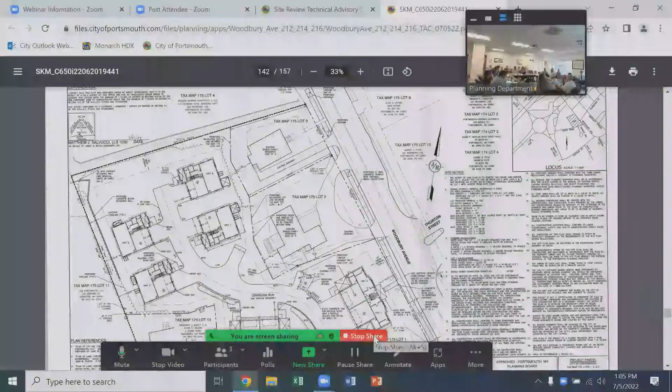The design incorporates having a driveway off of Boyd Road, to not have any new curb cuts or even use the existing curb cut on Woodbury. So we'd only have one driveway off of Boyd Road, which would line up with Manor Drive. It's a short driveway to provide access to these 8 units.

The unit makeup here is two duplexes and 4 single families. The parcel generally slopes towards the rear, or the northwest corner, which is the low point on the land. That's where we have our bioretention drainage system, and we would also be using the existing sewer on Boyd to connect these units into sewer, and we would be tapping the water main on Woodbury Ave.

We've already gone to a preliminary meeting with the planning board, and the discussion at that meeting included extending the sidewalk on Woodbury Ave, so we've incorporated that into this design. There's already a sidewalk on the other side of Woodbury Ave, but there's none on our side. So the sidewalk you're looking at on the site plan that Peter has up right now is all proposed sidewalk.

As was mentioned, there's no change to the curb cuts to lots 2 and 3. Those houses would remain, driveways would remain, and then we would be tapping into the water main on Woodbury Ave, which is on our side. We did provide lighting and landscaping plans, architectural plans by Art Forms. Wendy Welton did those designs.

Number 8 talks about confirming the right to flow stormwater onto adjacent land. Obviously, all properties flow basically onto adjacent parcels. The regulations require that we're allowed to continue that flow—we're just not allowed to increase it. So our drainage study shows no increase in stormwater rate or volume onto the abutting property. So we do not need an easement from the neighbor as long as we do not increase that, and that's the goal of your stormwater regulations.

Number 9: DPW has significant safety concerns with the stormwater detention area. The elevation of the stormwater detention area is significantly higher than the area behind the retaining wall on the adjacent property. That area is modified in order to create separation of the water table and stormwater treatment within that rain garden.

So we can look at maybe addressing those concerns by moving it away. We did try to keep approximately a 10-foot buffer along that property line, because there are some significant existing trees we want to maintain. So we tried to keep all of our grading away from the property line, except maybe exactly where the outfall is, so we could keep those trees, because they are significant and create a good buffer to the hotels behind us.

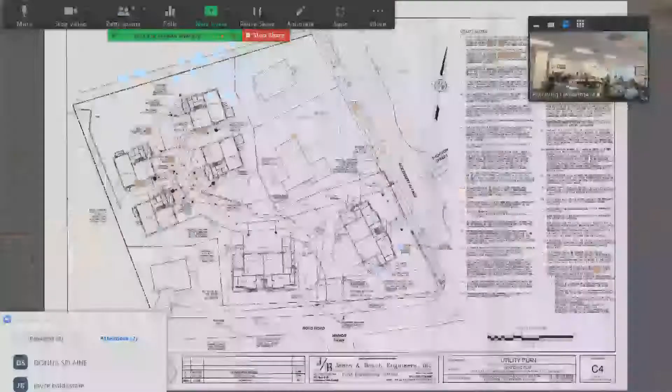Along Boyd? Yeah. Yeah, I mean, there's definitely room. Okay.

And the other comment I had was on the sightline plan that was provided. It combines two different types of sightlines. It really should be either one or the other - should have a stopping sight distance diagram and an intersection sight distance diagram. It should have a 2-foot object height in the middle of the road, at Boyd Road at the driveway, for vehicles coming up the hill on Boyd Road.

All right. All right. The 3.5 driver's eye height is correct, it's just that you should have a 2-foot object at the driveway. All right, I see what you mean, coming up the road towards our intersection.

Yeah, but as far as the sidewalk goes, we're proposing to build sidewalk along that entirety of Woodbury, which we're happy to provide, but I guess we've got to sort of figure out how much sidewalk we're building for this project. I mean, these 2 existing houses aren't really even part of our site plan application. We're proposing to tie in the existing sidewalk along Woodbury. So I guess the question is...

What do you want us to build? Because I don't think it would be fair or reasonable for us to build all of it. Certainly, the sidewalk along Woodbury is desirable, because you get more foot traffic out there. That's what we assumed as well. But it really doesn't tie into the whole site - that driveway, that walkway off of Woodbury, just comes into that one duplex.

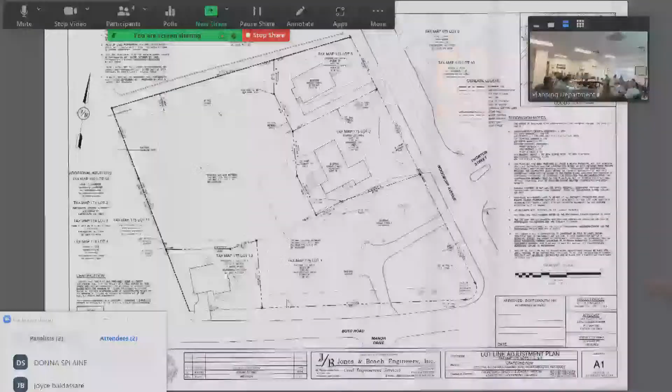Because we have some large trees on our property, we could run it through the green space on our land, or put it in the city right of way. I was going to put it in the right of way. I'd rather not lose more trees, or as many as we're already losing.

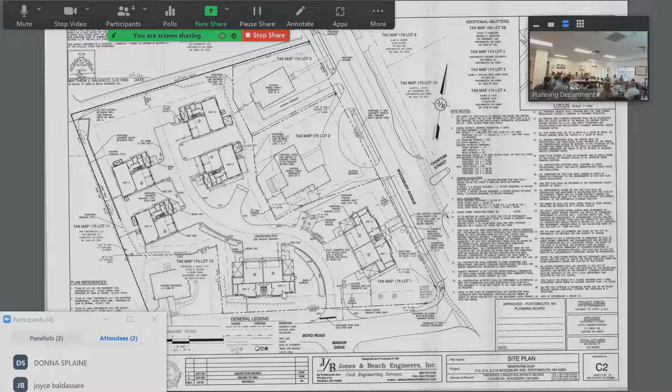It's nice that you're trying to keep the ones along the property line. I was going to ask for more street trees too on the Boyd side, maybe the Woodbury side too. There are a lot of trees out there now, nice to have those replaced. All right, we can look at that. There are a couple utility poles that are problematic right at that intersection of Boyd and Woodbury.

Maybe we can snake it between them, or put an easement on the corner. You'll figure it out, go to the back side of them on our land.

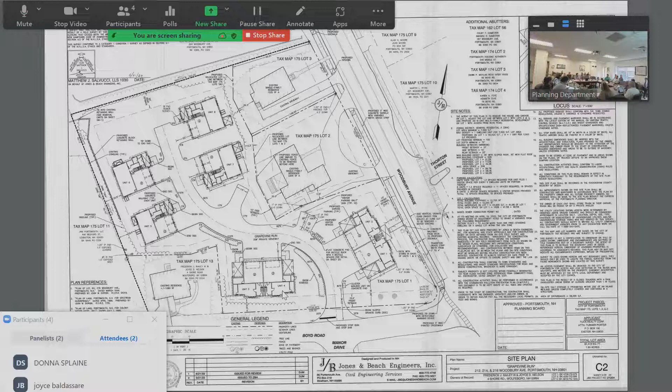Any other comments at this time from TAC? Peter, if I may. We may need a fire hydrant somewhere in there. Also, if this is going to be a Woodbury Ave address, we're going to need some signage. Just make a note that you'll need appropriate signage to get us to the correct driveway.

That's a good comment. I would think we'd have our own road name, a private drive name, and be off of Boyd rather than use Woodbury addresses, which would be confusing. I just wouldn't know how to get to them. Some kind of signage will be required regardless, if it's a private road, so it's easily discoverable for emergency access.

Is that a private road? No, this is all the city. We'll come up with a street name and show a street sign. That's what I was bringing up. So it's a Boyd Road address? It should be.

Or were they thinking of making it... where's the hydrant? I'd see it as a Boyd address, but I don't know about the unit numbers — 320 Boyd Road, Unit 101, 102. All I care about is having a sign that says 320 Boyd, or 7 Boyd, that's it.

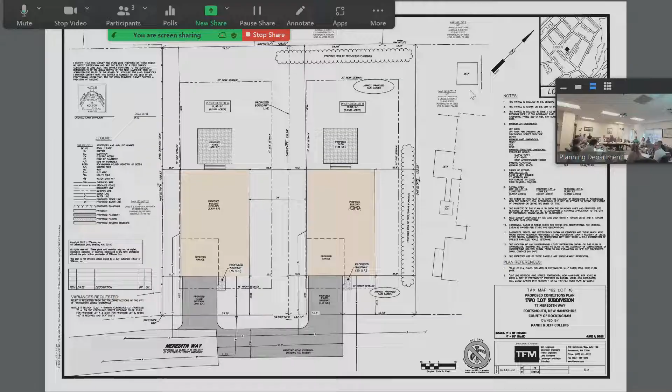This would all be open, no one would park in it, because they drive in like that and then go into that garage. I'm not trying to be difficult here, I think there's a solution that's gonna work for you and also provide a turnaround. You may just have to roll up your sleeves a little heavier on the drainage improvements on the front.

Because you're gonna have more pavement. Wouldn't you use pervious pavement? You could do it, not my expertise, but I would think you could. It's gotta be maintained, or the turnaround doesn't work for big city trucks, you might not want that.

Are you proposing rain gardens up here? I may have missed it, but it seemed like there's a lot of water at the front of the site and the back. This is standing water, but there's a lot of water in the spring up here. Is there a landscape plan for that, showing what you're gonna do?

We just dug test pits last week, so we're still in the process of doing the grading and drainage. I guess we were planning on rain gardens. As far as the water accumulation in the front on the Meredith side, I don't know if you know, I've lived there for 10 years and we've never seen it

linger more than a day. It's not constant. Yeah, it drains, I don't know where it goes, but it does disappear. Must infiltrate. Well, that to me is good news, because it means there's less sensitivity to impervious surface in the front. Other than your budget. The back is a different story.

So where's the water from these roofs gonna go? Are you gonna direct it into the front, or does it go into the back? We haven't finished the drainage design yet, but we would direct it to one of the rain gardens.

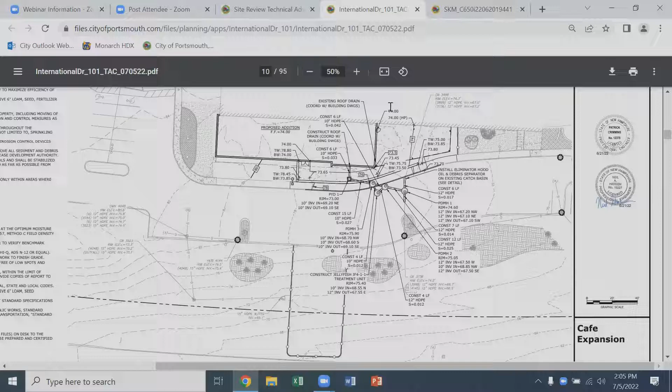If you go to the next sheet - stormwater on the site, we'll be connecting the addition area into a jellyfish filter and then discharging into the existing stormwater system. That system runs around to the back of the building into the existing detention pond at the rear of the site. There's an existing roof drain that comes out of the building in this location, so that will be maintained as part of this. There's a drain inside the footprint that'll be converted to just a clean out, and the roof drain will be maintained into the existing system.

If you go to the next sheet - utility-wise, the main piece here is the replacement of an existing grease trap that's located in the patio where the addition's going. The current grease trap comes out of the building in this same location as where we're showing it here, then goes through the grease trap, and the outlet of the existing grease trap actually runs back into the building and discharges out to the sewer in Goose Bay Drive.

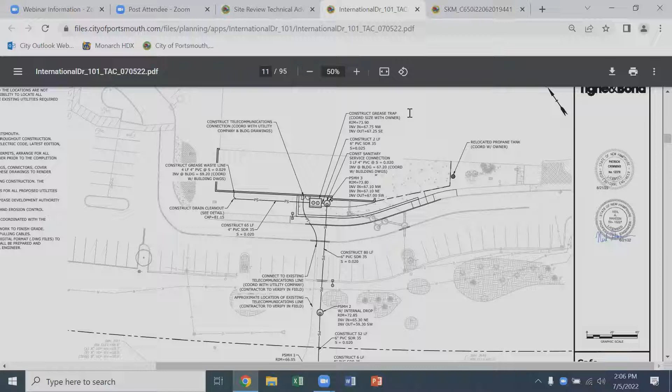Because we're pulling the grease trap farther away from the existing building, we can't get tied back into that existing outlet, so we're proposing a new connection out into the sewer, which runs down the shoulder of International. I don't recall the existing size of the grease trap, but the MEP for the project has done some calculations, and the new grease trap will be a 4,500 gallon grease trap. So that's the general overview of the project.

We did receive some comments on Friday, so I'll run through those quickly. First comment is the applicant should adjust the landscape plan to incorporate irrigation conservation measures as listed in section 6.11 of the site plan regulations. Since the project is out of Pease, it's covered under the Pease Land Use Controls, so this section does not apply. However, the existing irrigation on site, which we'll be continuing to use, is on an automated timer system, so I believe that covers what would typically be required.

Second, the current site plan shows the addition of a jellyfish filter for BMP. The applicant should provide a description of LID measures such as using a recycled water system and increasing the permeability of walkways and patios. Again, this project is covered under the Pease Land Use regulations. The main component we needed to address was the requirement by the PDA that we treat 2 times the amount of proposed impervious area we're adding to the site. This project is increasing the impervious area by just over 2,500 square feet, and the area we are treating with the new stormwater filtration system is 6,500 square feet, so we are over that 2 times the proposed amount.

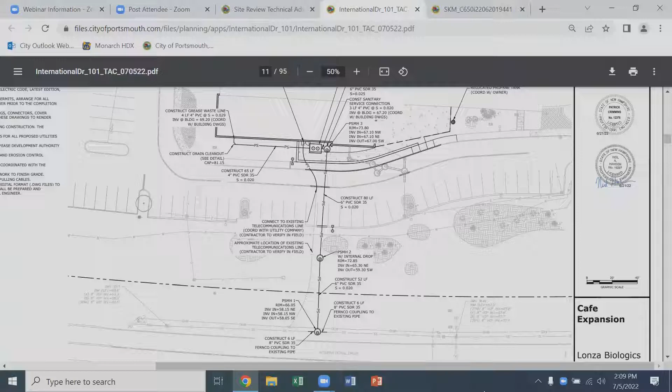Great, thanks. Any other comments or questions? Question for Mike - is there actually vitreous clay sewer out there, or is it all AC? Michael Mates from PDA Engineering Department - I couldn't tell you without doing more research to find out what's going on there.

The surveyor listed it as vitreous clay, but I didn't think there was any clay out at Pease. Oh, there is still a little bit left in random spots. Okay, but so it might be - I don't know, that's International Drive.

So the only comment is if it's AC, you should put a note on there that says it's potentially hazardous to cut it. But we can note it anyway, just in case that's what they find. This survey was done in June of this year, so surveyors have gotten materials wrong - it's been known to happen.

Anything else? Just a generic question - what are the white boxes in the cafeteria that are drawn here? Those are stairs. There's a mid-tier level inside, slightly elevated. Right now the proposed addition is built into the side of a hill because the parking lot's at a higher elevation, so there's a raised tier inside so people sitting in the cafeteria can see out. I think there will be some low windows along that wall. I guess I should have just assumed they look like stairs. They are stairs, yes. It was too easy, Dave - I couldn't help myself.

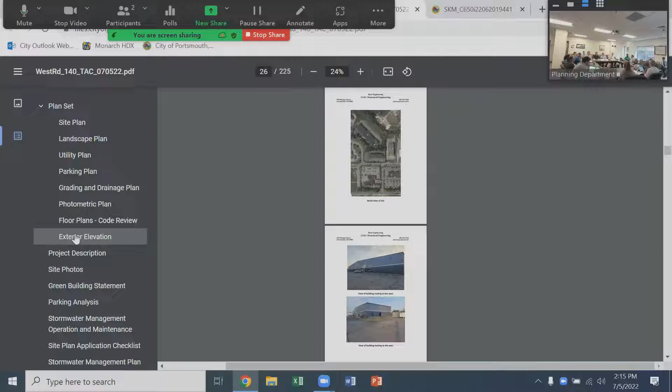We can go through briefly the architectural plans. We'll start with the interior and then move to the exterior with Alex. In general, the exterior of the building is going to have minor modifications. We're adding some openings, a couple stair towers, because we're actually going to be infilling with a second floor about two-thirds of the building, since right now we have well over 20-foot ceiling heights inside.

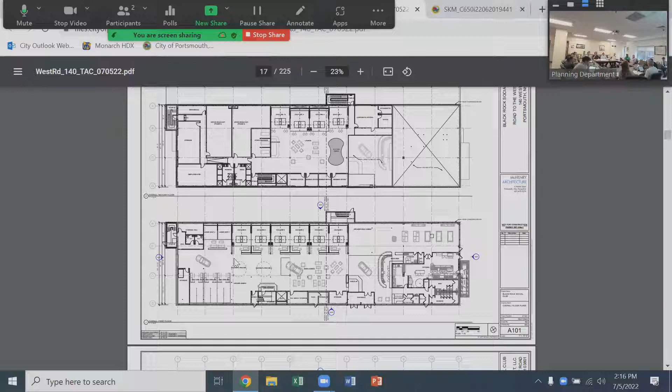It's like page 18 or so, where we get to the floor plans. So as I mentioned, it's going to be kind of a sports and social club. Right now, we're going to be providing a kitchen on the right, a little over 1,000 square feet for service, with a bar in front of that. So starting from the right and moving left...

We're going to have 10 golf simulators, 6 on the first floor and 4 on the second floor. These are by Top Golf, or the company produces the same simulators used for Top Golf.

In addition to that, we're also going to have axe throwing. There's 6 axe throwing lanes on the bottom left-hand side. That's a company out of Rochester, New York that manufactures the axe throwing games. In addition to just bullseye, they use projectors to project games onto the wood boards, so the games are kind of endless - tic-tac-toe or various other things. So we've got 6 axe throwing lanes there.

Across from that, we have a laser shot system. There are two areas for that, which are simulated guns, and can have various games as well, not just single target practice. Alex has also talked to the police department regarding this, that this could be an opportunity for training for them as well.

The second floor is a combination of more of the social club. We've got conference rooms for members to use, some additional simulators, corporate offices, and then also an allotment of space that's going to be future leasable office space for other tenants. As I mentioned, we're really only expanding the footprint of the building - there's 2 stair towers on the west and north of the building, as well as a walk-in cooler on the east side. Otherwise, the footprint of the building hasn't changed at all.

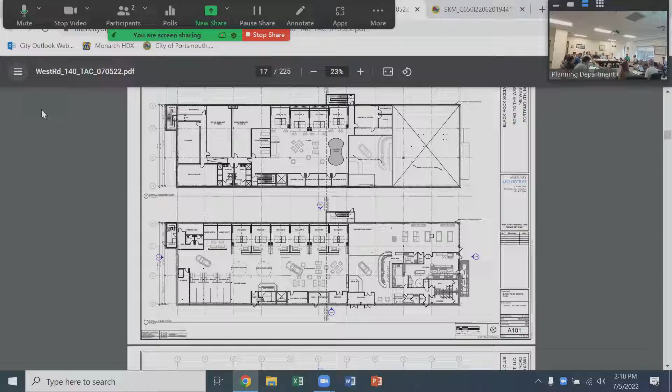So I'll turn it over to Alex, and he can go over more of the site stuff. Thanks, Mark.

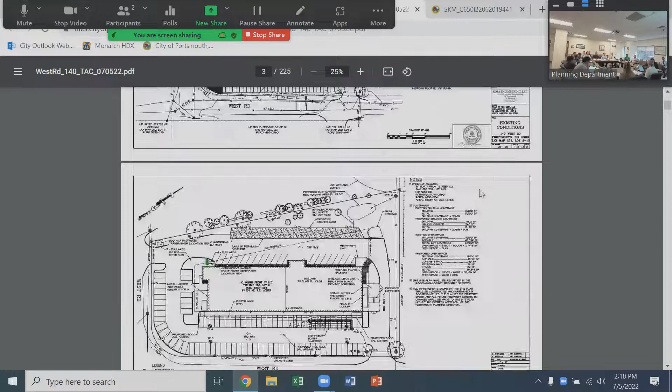I think we covered a lot of this ground at the last meeting, but if we can go to the existing conditions plan, Peter. I don't know if everyone's familiar with this site, but this is a fully developed site. It was built in the late 80s - a lot of pavement, no landscaping, no real provisions for drainage. So there's a lot of room for site improvements. If you can go to the next sheet on the site plan.

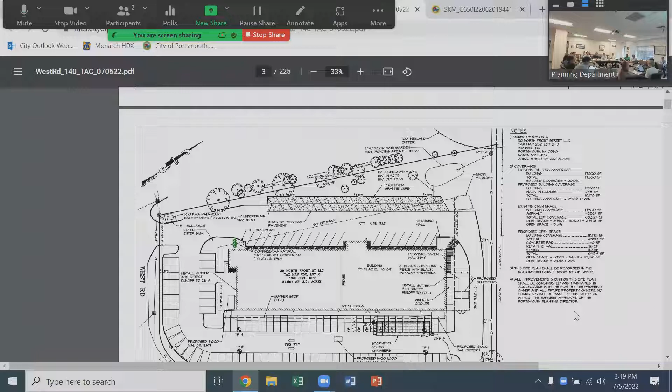Can I stop you real quick, just while we're looking at the existing conditions plan - that drain pipe that's going down the east side, is there a drainage easement for that? Because the Market Basket is using that to convey their stormwater through there, aren't they? I'm not aware of a drainage easement. No easement, no. Okay, thank you.

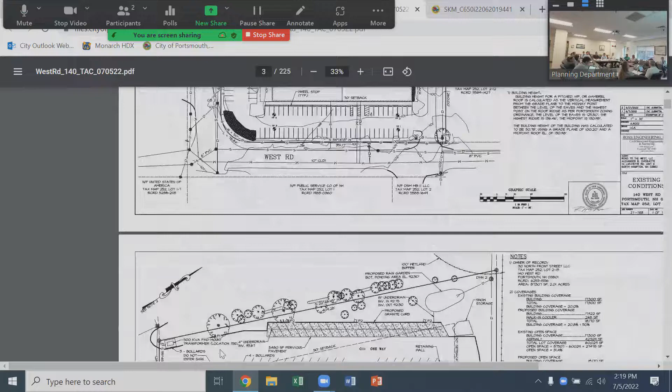So if we look at the site plan, we've made this parking conforming. The existing parking spaces and lane widths are not conforming, so we've shifted things around. We do have an adequate amount of spaces. In the right front of the building, we have placed some stormwater detention chambers, and also we have done 4 test pits in the front of the building to prove that we have good receiving soil for that. One of the comments at the work session was it was recommended to put in some pervious asphalt, so we did put that out back behind the building. We can get into that more on the drainage plan.

So if we can go to the landscape plan.

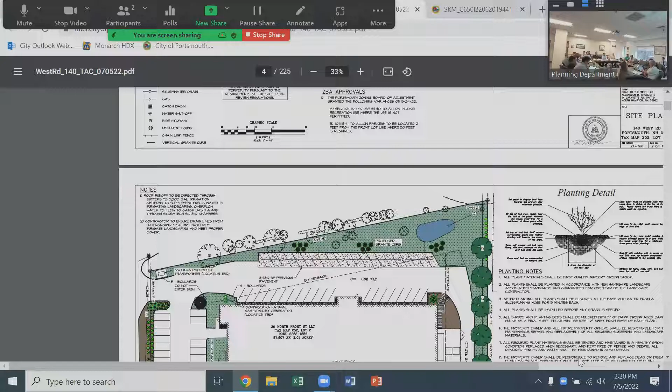So currently the site is really kind of barren. So we came up with a big improvement for the landscape, trees along the east side, a lot along West Road, and then some additional planting areas next to the building where we could fit it in. I know one of the comments was it was recommended to try to break up the parking spaces with some landscaped islands, so I'm sure we can fit that in.

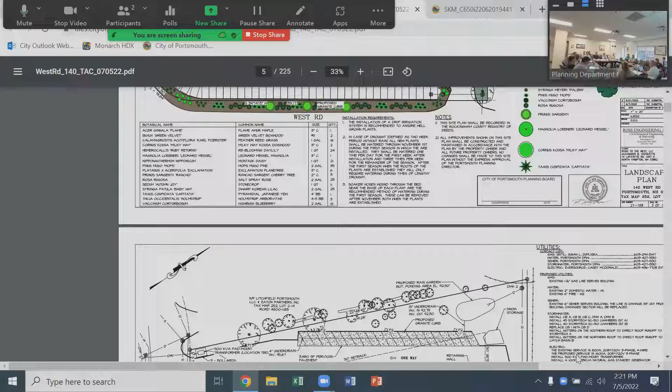If we go to the next sheet, it's the utility plan. So on this plan, you can see in the upper left, we have a new electrical service. We've also shifted the generator, that was one of the comments at the work session. And also a comment that just came out Friday was the grease trap is recommended to be shifted closer to the building and try to remove some of those bend lines, and we can definitely accommodate that.

And then if you can go to the parking plan. So this sheet has all the parking spaces numbered on it. And as was discussed, the board would like some landscaped islands. So we were thinking about space 48, which would almost be in the front of the building up by West Road, so that would break up that area. And then 87, which would be way out back, almost in the middle. And then along the curve, 117. And we still have enough parking to meet the calculation if that's done, so we'd be happy to do that.

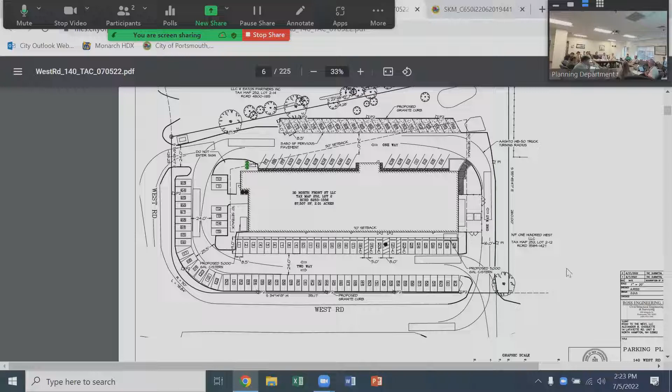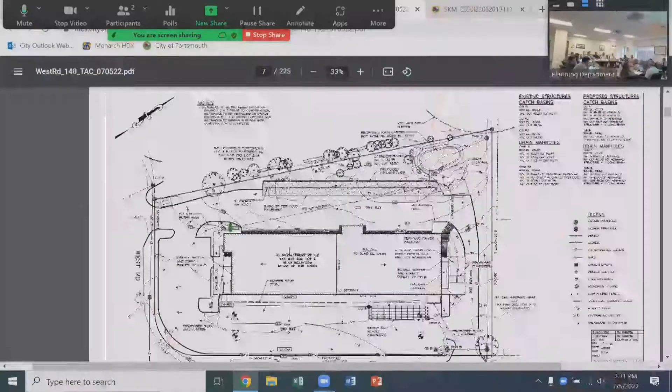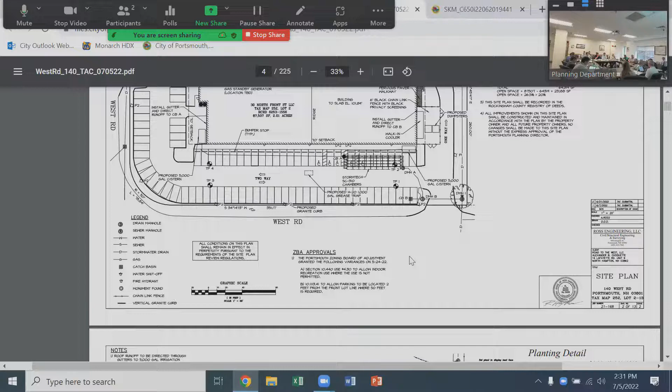There are 6 green trees shown on the landscape plan that should definitely not be there. See what I'm talking about? I do, yeah, these right here? So there shouldn't be any trees growing on that line. And because that line is really very important to the overall functioning of the subdivision that is the industrial park, I think we're gonna need to make sure that there's some sort of easement for whoever's using that pipe.

I'm not sure the city's tied into it, but I know Market Basket is. I don't think Market Basket is directly tied. I think that's how they drain that whole giant retention pond that's behind Hebert's, that's fenced off. That's where that pipe's going. So this is a very important pipe. So we need to figure out who's tied into it and make sure that they have rights to it, because if they lose the rights to it, it's gonna be very expensive for somebody.

Yeah, we can adjust those trees or remove them. Sure.

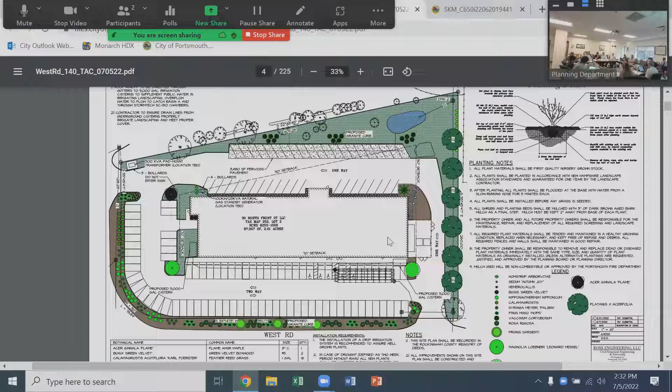I had a question on the, you moved the pervious pavement, but you didn't comment on how you're gonna deal with the under drain of it. Is it gonna try to infiltrate, or is it still piped directly to the rain garden? I think it depends on the test pits you're gonna do, right? It would be both, but we'd want to do a test pit, and we can provide that information. So originally there was really good soil here, but a lot of it got mined out, so it really depends on what they left. And some of the stuff they left wasn't very good.

What type of soil are you typically looking for in that area? Well, originally that was all really nice gravels and sands. But to use it as pervious pavement treatment, you need to have pretty good material, so you're gonna have a layer of good material right underneath the pavement, of course, hopefully. That's the plan, and it's really what the soil is like underneath that.

So what they did in general was, when they were mining this, they would sell it as material, and then they would allow people from other areas to bring their dirt in to fill the hole back in. So you might have any number of things under the ground, and probably not the beautiful gravel that was there originally. But some of it was - I mean, the Market Basket site was all really nice material. So that's why the test pits are important.